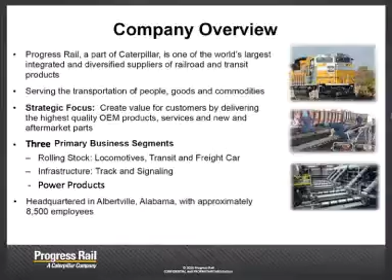We are headquartered in Albertville, Alabama, and our engineering headquarters is in LaGrange, which is exactly 15 miles west of where we are. We have a global presence, pretty much.

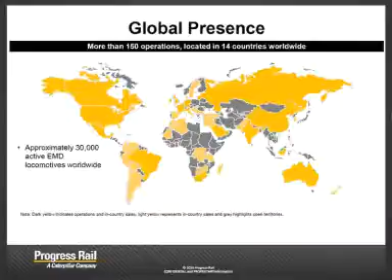So I think I'm going to talk a little bit on the next few slides. There are 65 or 66,000 locomotives which have been sold by EMD, and 30,000 of those are still active. So with that, it makes us one of the largest locomotive manufacturers in the world. We sell in almost every country, actually in almost 75 countries for the line haul.

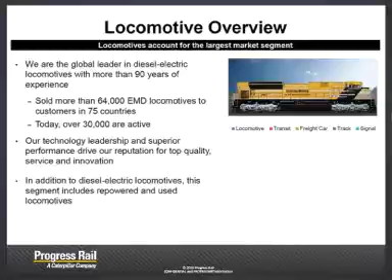And we actually just entered the transit business, the passenger car. This is in collaboration with our colleagues in Caterpillar with the C175 engine. It's a high-speed engine, and it's a high-speed locomotive. So you can see aerodynamics is one of the key players there. This is actually one of the first Tier 4 locomotives in the transit applications.

I'm going to go a little bit more in details. It was basically a joint venture with Progress Rail and Vossloh, which is now Stadler.

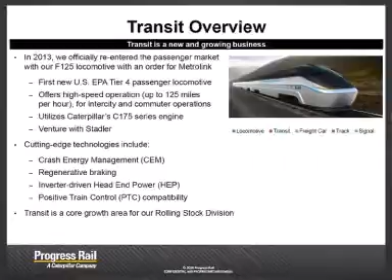The locomotives we make are sold in different countries, and this is kind of a quick overview. Every country has their own requirements. Every country has their own regulations. Every country, the railroads are either managed by the government or it's a private entity. So one of the things, when we were called Electromotive Diesel or EMD, we used to also call us 'every model different,' because every locomotive we make has something unique to it. So these are some of our standard locomotives which have been sold throughout the globe.

Moving into the power products business, that's again a big portion of our portfolio, and for the last 2 years I've been very active in the power product market. Together, EMD and Caterpillar, we have a big market share in the inland river boat application, which is one of these boats.

The interesting thing about the inland river boats is if they are going south in the Mississippi or up, they're going to go pretty much full throttle and stay there for 10 to 14 days. They're going to dock, have a crew change, and then go back at full load. So basically you have a lot of mileage, or megawatt-hours, they accumulate a lot of those.

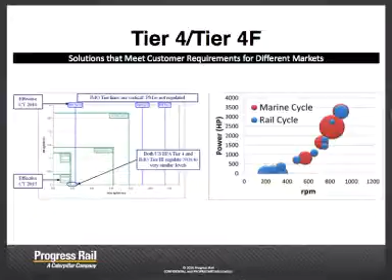So with that, our tier 4 started in 2015. Most of the heavy duty applications were ready with tier 4A in 2007. So we had a bunch of engineers in the room and said, okay, let's see what they have done, and it should be easy. It shouldn't be that challenging.

So we approached a lot of component manufacturers, especially on the after-treatment side, and we asked them what have you got, let's start from there and see if we can use any of the after-treatment system. So they came back with a catalyst about this big.

And for the given flow in our large engine, you actually need a lot of those. So this is again work we did with Union Pacific, and this report is on the California ARB website.

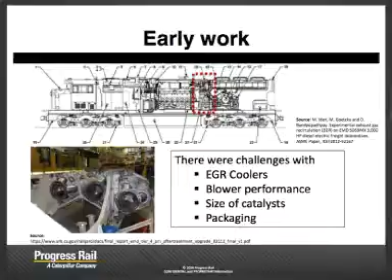We had some issues with the blower. This is something quite different from a 4-stroke, because our primary engine is a 2-stroke engine, and it always needs a positive pressure delta. So you need some form of a positive displacement device to take the exhaust energy and push it back. We were getting, and that's quite uncommon in the industry, so we're not able to get the right size blower which operates through the entire spectrum. With all this, in our very early stages, we were struggling, trying to understand what would be the optimal solution. So at that point, we went back to our customers to understand what they actually want.

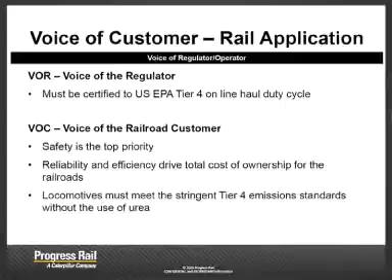You can meet the same emissions using either an after-treatment solution or an in-cylinder solution. As I talked about the various applications we serve, our rail customers, the big customer is the regulatory bodies - we need to meet their requirements first. For the railroad, safety is the primary component. Safety, reliability - they want their locomotive functional when they need it. And one thing they really wanted is a urea-free solution, mainly because most railroads have their own network of fueling, and adding another fluid is going to add a lot of cost.

Marine, on the other side, is a completely different scenario. Obviously we have the regulatory requirements. If you look at a marine application, we are the engine OEM - we do not make the entire ship. In the shipbuilding process, you have the naval architects who design the ship. For them, it's a matter of which engine fits in their engine room, which one doesn't make their engine room too cluttered.

So when we're talking to naval architects, one thing they specifically mention is it's much easier in a boat to lengthen it than increase the height, because that changes your stability. If you're adding an after-treatment system, try to keep it in the same plane as the engine, so you're not changing the location of the center of gravity. These things make a lot of difference from an engine OEM perspective, and how the naval architects decide which engine they will be using.

The shipyards want to minimize the construction cost. They don't want the engine to go in once and then have another setup where the after-treatment is mounted. They just want a drop-in concept, which is one of the main primary concerns.

But the most important is the people who are going to use the boat. They obviously want to spend the least amount of money on fuel. They want some thermal efficiency back from the engine with the lowest DEF consumption, and keep it simple - they don't want that transition where you're now adding 10 different knobs, but the operator shouldn't see 10 different knobs at the same time. You need to add simplicity so you're not scaring the customer.

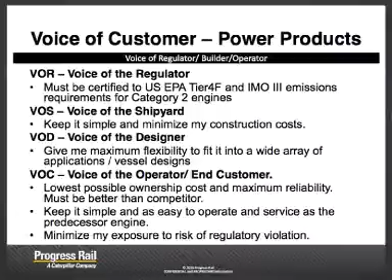So with that, just to give a few solutions for the locomotive application - it's the SD70ACE, which is our Tier 4 locomotive, and it's a 4-stroke engine with a cooled EGR solution. A couple slides back, I showed you how the EGR cooler space was. This is our entire EGR cooler. We're able to package it down and minimize the risk of EGR fouling.

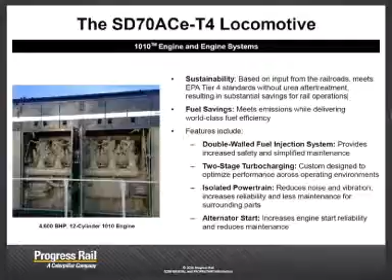We have a common rail system with a double wall, and again, safety is the primary concern. We need to make sure that with the high pressure there's no fuel leakage, or if it happens, it's well contained. So we have a double-walled fuel injection system, two-stage turbocharging system. The powertrain is completely isolated, so that from higher peak cylinder pressure you might have higher vibration levels - it's completely isolated so the cab operators don't get that impact.

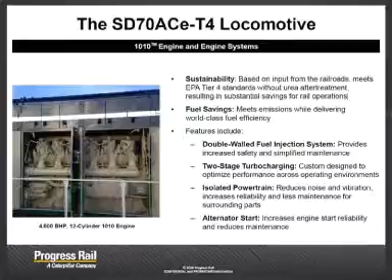And again, a lot of things which locomotive customers want. So once again, in a quick nutshell, the fuel efficiency is actually one of the best in the industry. Reliability is something we need to continuously improve. We have entered Tier 4, and as we go into the next regulatory limits, one thing we have to keep working on is reliability.

As I keep mentioning, there are more locomotives in the field from before I was born. So the locomotives we are selling right now are still going to be operating the day I retire, and I'm relatively young - that's the life expectancy expectation from the customer. So if we're doing something today, how do we accommodate the next generation of regulations, and how do we meet those? Those are things we have to think about from now onwards.

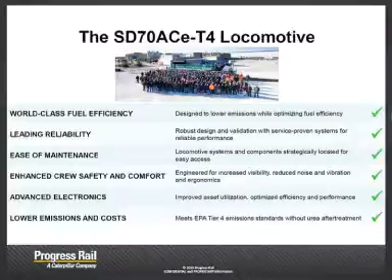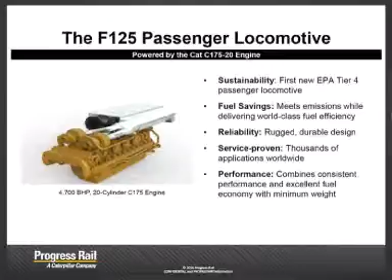The F125 locomotive, this is a collaboration we did with our joint partners - well, it shouldn't be called a collaboration, it's basically just calling our colleagues in Caterpillar. It's a C175 with a urea system. It's one of the smartest after-treatment systems I've seen. It uses a Z-flow concept, and it works very well. It's a high-speed engine, mainly for the passenger locomotive side. It's coming to market for the Metrolink application in California, so you should see some coming soon.

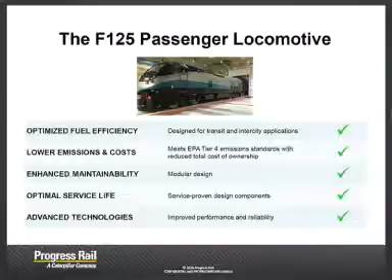The marine solution is kind of very interesting. I talked about a lot of the requirements, but one of the big ones for the locomotive - especially, you saw two slides back, the after-treatment system - serviceability is one of the key issues. If you look at how a locomotive is serviced, it goes into a shed, the hood comes out, and they can take the entire after-treatment system out and do the servicing, or take another module and drop it in.

Marine is completely different. You're tucked in an engine room way below, and if you need to take anything out, or the engine out, it's close to $10 to $12 million investment, because you have to cut things up there, which is as expensive as a new boat. So the concern was, I need to service the after-treatment system if I need to, in the engine room.

So what we started looking into is what other components, other areas, we can combine it with. We had this accessory rack in the back where a lot of the things which were not part of the engine mounted were mounted over there. We started optimizing those - we went from a single lube oil with a paper filter to a high pressure oil filtration system, saving some space so that we can accommodate the after-treatment system.

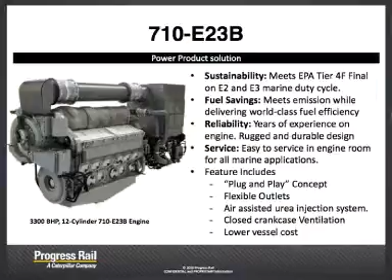Fuel efficiency, that's the big thing. We want to make sure we preserve the fuel efficiency and increase the thermal efficiency of the engine. Marine engines are big into transient response - this could be one of the Tesla ads - we go from no load or idle to full load in 13 seconds. Actually, in the past, our valor test for the marine application was 11 seconds, and we need to preserve those.

So there's a lot of energy coming towards the after-treatment system, making sure the after-treatment system can handle that. Vibration - we need to make sure it can support the 3G of vibration which the after-treatment system might be seeing on a locomotive. Actually it's slightly higher, and for the marine it's around 2G.

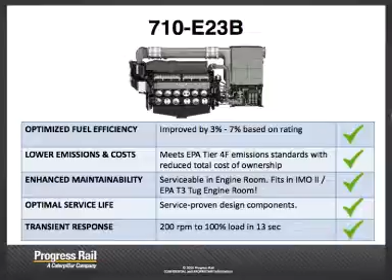So with that, I would leave a few minutes for some questions, but just wanted to give you a quick flavor of the different solutions. One thing - any solution we already have or will come in the future - is always driven by our customer: what do they need? And it's a long process. It's going to take a few more years because this is just a starting point. It's going to continuously get tweaked or improved, and there'll always be a better solution tomorrow. So if anyone has any questions.